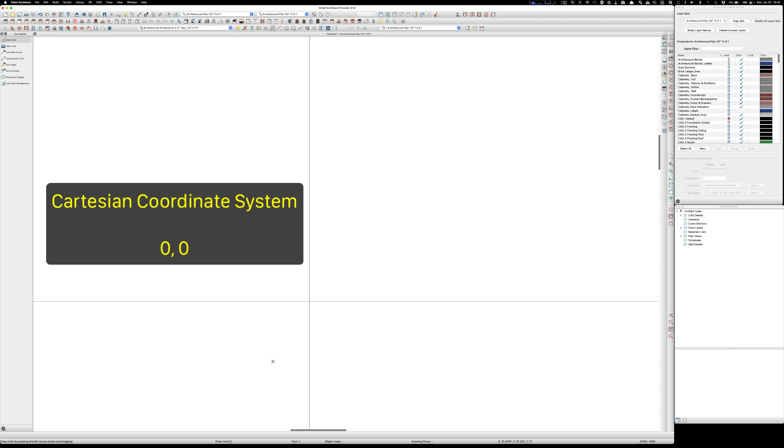All right, so what you're going to do, this X right here happens to be 0,0 in this software application. And actually, I'm going to take a box. I'm just going to go like this, okay? And I'll go, that's plenty long. And what I'm going to do here is I'm going to go with a 9-foot ceiling, which is 9 foot 1 1/8.

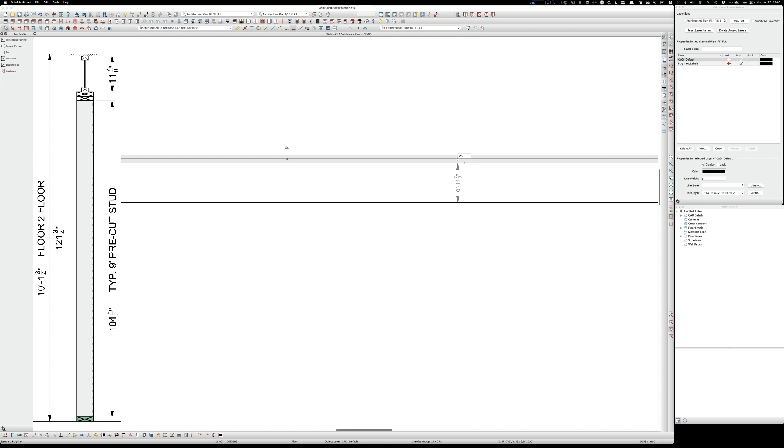And then I'm going to put another box on there. And this will be 11 7/8 I-joists. And then I'm going to put on 3/4 inch subfloor. And let's dimension that real quick.

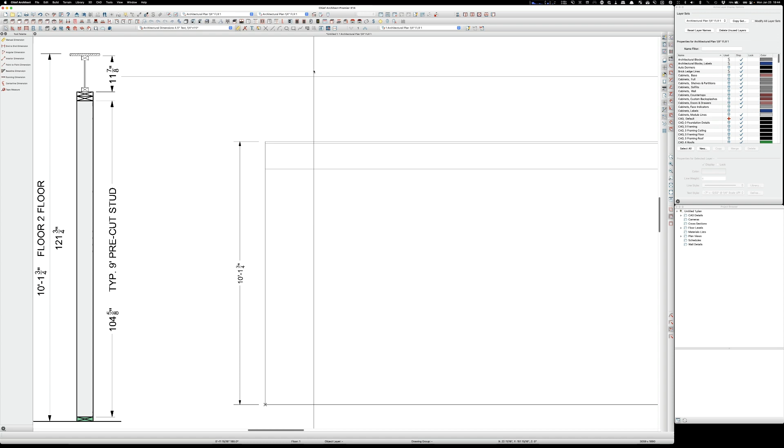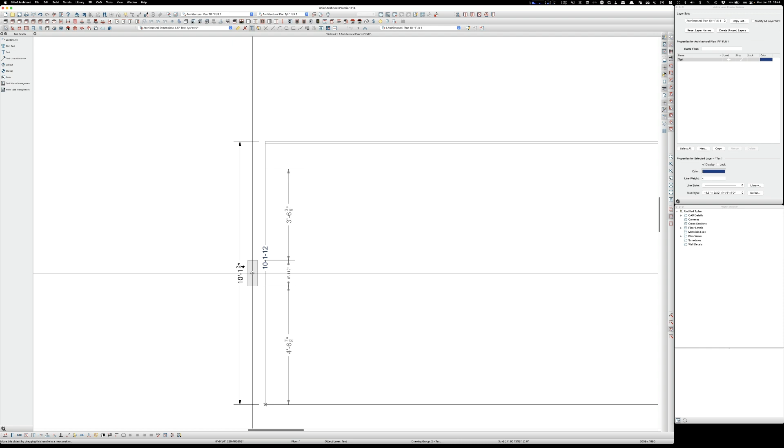All right, 10 foot 1 3/4. And if you were to write that in feet, inches, sixteenths, that would be 10-1-12. So I'm just going to put that number over there. Whoops, come here, you. Actually, I want to do that. That's weird when that happens. Some kind of shortcut thing. All right, so there's the height, floor to floor.

Let's say this is slab, whatever, and they're going to have LVP down here and LVP up here. Sometimes you might have tile or carpet or real hardwood or whatever, and then you'll have something different up here, and you have to take those into consideration when you're doing your calculations.

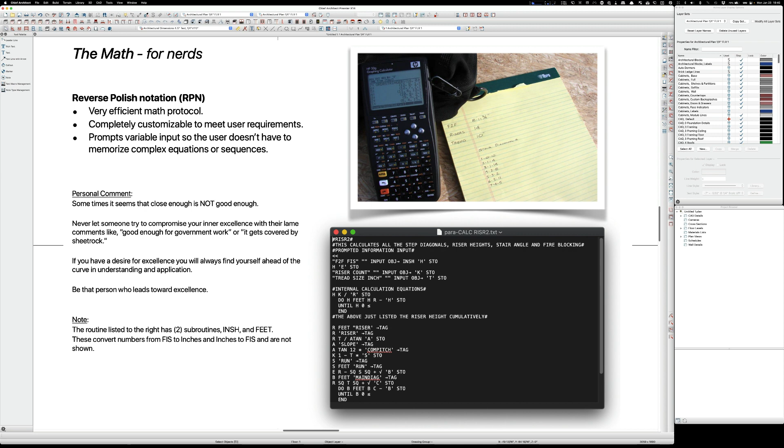So I'm going to try something new. I'm also going to include the calculator that I use and screen record it. And then I'll just learn how to use some video editing software and I'll mix it into the video somehow so you could see it, like it'll be off to the side or something. So give me just a second. I'm going to turn on screen record and microphone on. All right, so now that's recording.

Here's the calculator. And what we're going to do is we're going to hit riser 1. And our floor to floor in feet, inches, 16ths, we're going to enter that. 10-1. Oh, that's not, duh. Okay, so 10 space 1 space 12. So it's an array, and then you hit enter. And what this does is it gives you options on riser height.

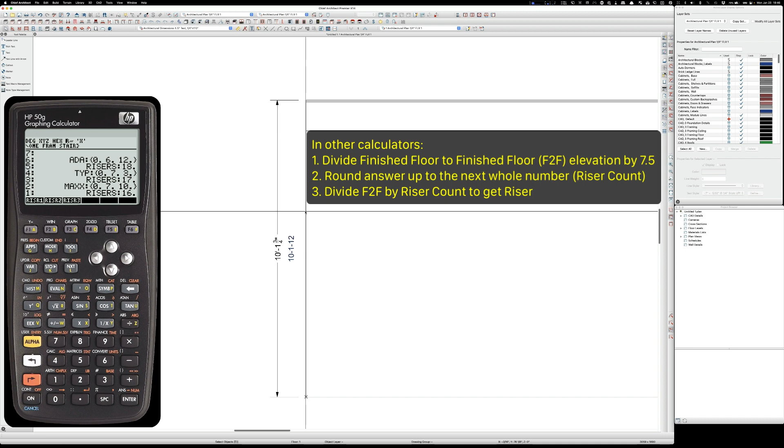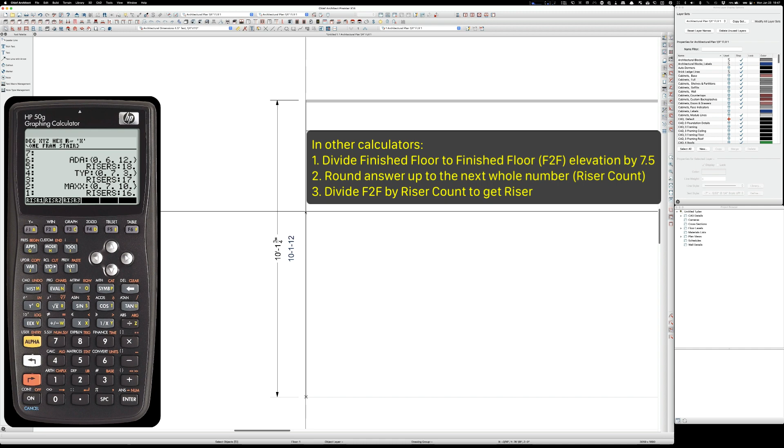So if I went with 16 risers, my riser height would be 7 5/8, which is the optimal riser height for stairs. If you did 7 5/8 and 10, that's optimal. If you want a more comfortable step, you would go down to 7 3/16, which is, it says TYP. Or if you wanted ADA, it has to be 7 inches or less. So you would be 6 3/4 inches with 18 risers.

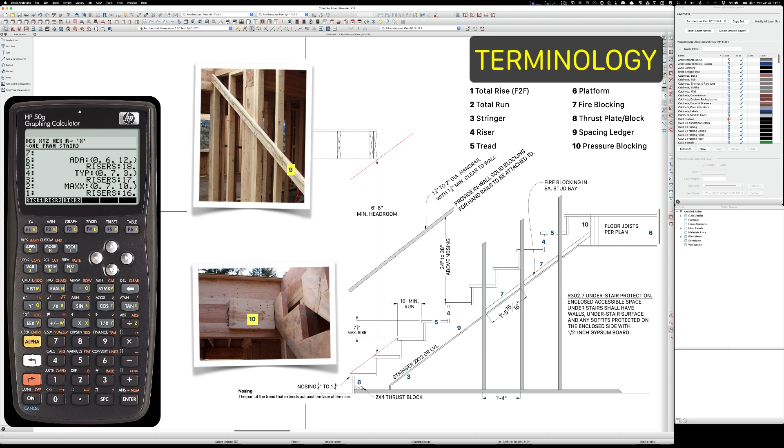And as everybody knows, as you add a riser, you also have to add a tread. So if your stairwell opening is tight, you're going to want to go with 16 risers and 15 treads. Or if you want to go ADA, you're adding 2 extra treads. So it could be 20 inches or 22 inches that you're adding to the length of your stairs. So for this one, let's do 17 risers, and we'll just take the middle.

So what I'm going to do is clear this. We're going to make these very comfortable steps. We're going to go like this. 10 space 1 space 12. Enter. You see how the calculator prompts you with the information?

No calculator in the world does this except this one, only because I programmed it, and you can program it too. If you had this kind of calculator, you can make it do exactly what you want. And one of the reasons I did this was I didn't have the money to have multiple calculators, and number 2, I don't like remembering all the steps and what button, and way more button pushing in a Construction Master or Build Calc where you could fat finger something. Then you got to start over.

So riser count, we said we were going to do 17. Enter. And on this one, instead of doing minimum 10 inches, we'll do 11. Enter. And boom. So let me identify these numbers. The first set of numbers on the bottom, the 16 long to short and 12 long to short, that's the length along the top of a board, typically whatever your walls are made out of.

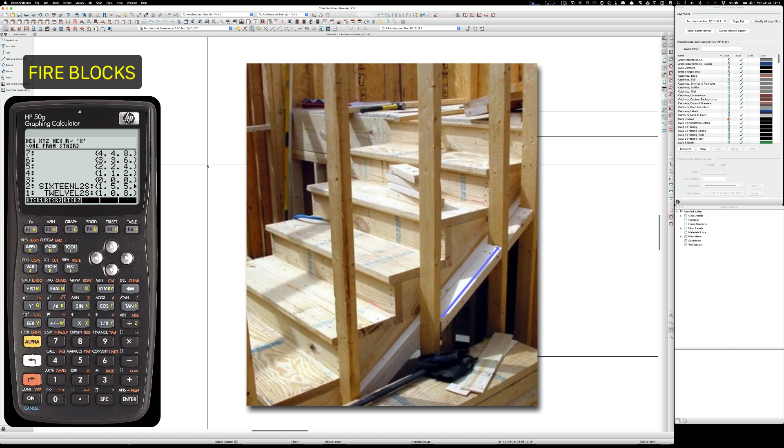And these numbers are your step diagonals. And that's from the intersection on the outer edge of the stringer where the riser and tread cuts meet, from that point to the next point to the next point to the next point. And why these are good numbers is you can lay out your 2x12 or your LVL, whatever you're making your stringer out of, and make a mark at every one of these points.

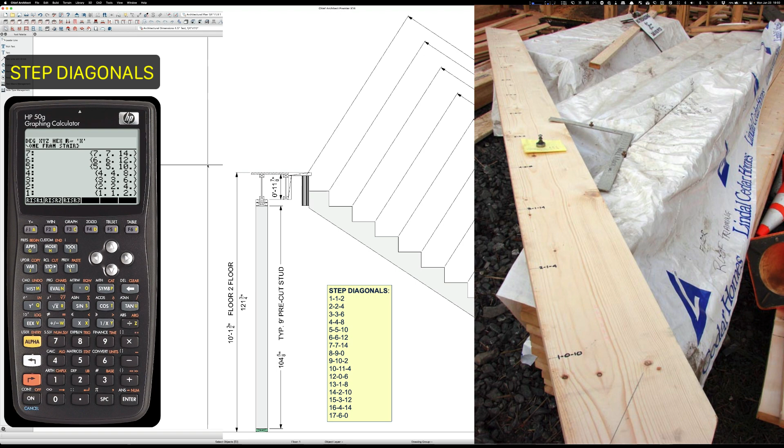And then as you're sliding your framing square along, you can make sure that you are lined up on that mark instead of coming along 11 inches and eyeballing it and maybe using a Sharpie and making your line kind of thick. Ask me how that happened. Yeah, I've done that. I've laid out a set of stairs where by the time I was done, I was over 3/8 of an inch off at the end because I wanted to use a big bold line.

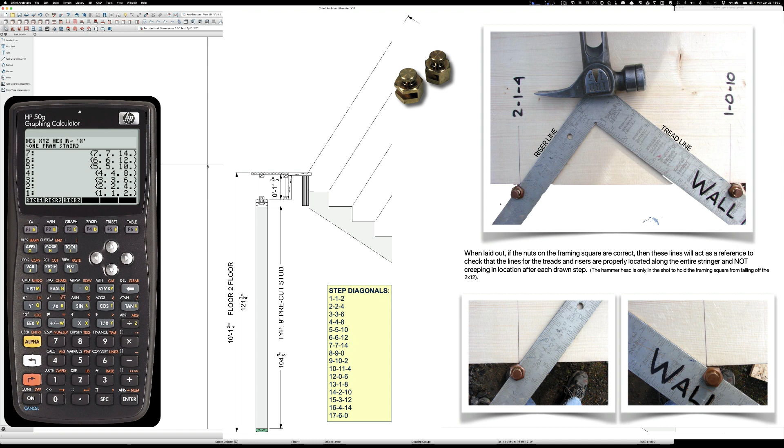So I was able to fix it, but to be precise, lay out your step diagonals, and there they all are. I'm slowly getting them.

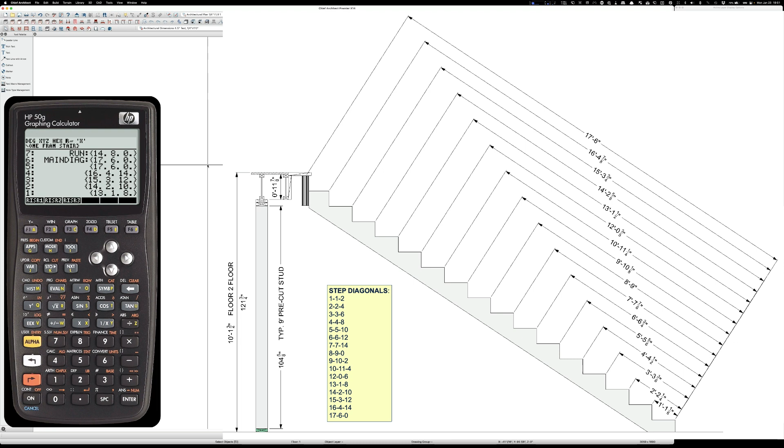There's a little bit of a lag in this iPad app. I think I'm going to turn that down a little bit because it's just a little bit annoying. I'm wearing headphones, so it's hard to kind of focus on that.

Okay, so your main diagonal, that is how long your stair stringer is exact. So if I was going to order a stringer, I don't think I would order an 18-foot because there's not enough. Typically, when you get into those kind of boards, there'll be a split or a crack. If this was an LVL, sure, 18-foot LVL, or you can actually order those and by the foot length. So anyways, I would order 20-footers.

And then here's your stair run, your stairwell run. And it's in feet, inches, sixteenths, or inches, because some people swear by inches. The common pitch, if you wanted to take your speed square or whatever, is 7.8 and 12, if you needed to draw that line on something.

And where it says slope 33.06, which is really, in framing terms, 33 degrees, that would be the bevel that you would add to your fire blocking so that you could cut long to short on a chop saw and make your blocks 1 foot 5 and 5/16 long to short at that bevel. There's the exact riser to that many decimal places, or it's 7 and 3/16.

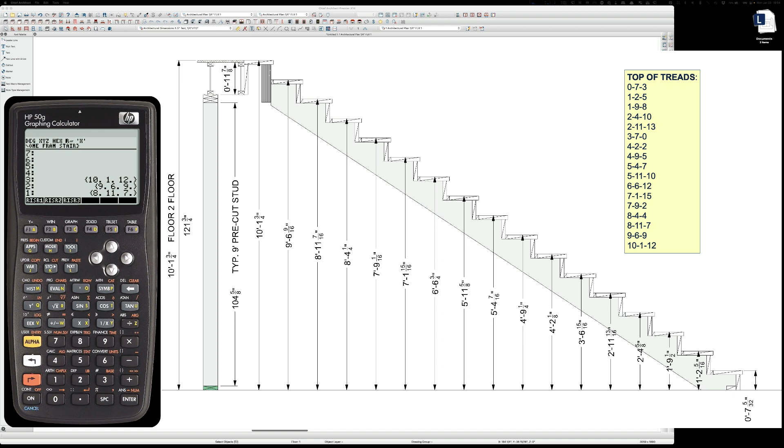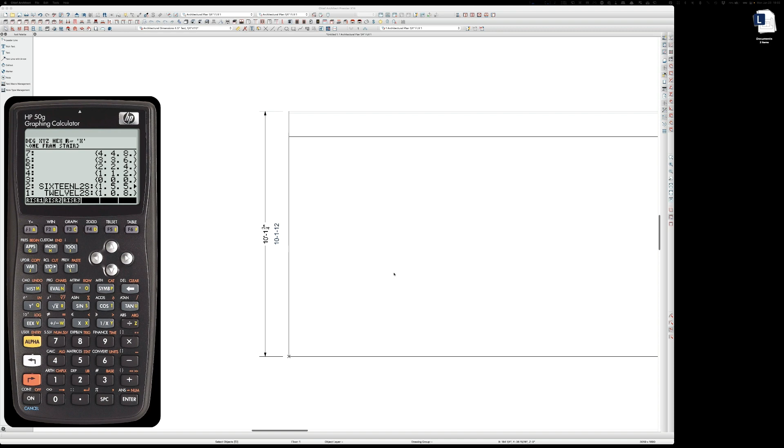So what I'm going to do now that I've erased everything, I'm going to go back and I'm going to really quickly crank these numbers in and then stop recording, and I will use this. Boom. Okay. We're going to stop recording on this one.

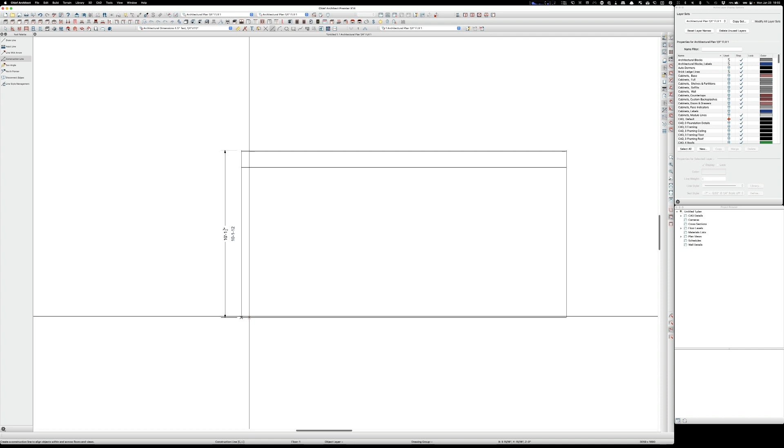And now we're going to come over here. This is the CAD program. I just need to get that exact number, how far I'm coming up. I'm going to try something different this time. I'm going to use construction lines like this.

And, whoops, sorry about that. These headphones are kind of, you know what? I don't think I need these headphones.

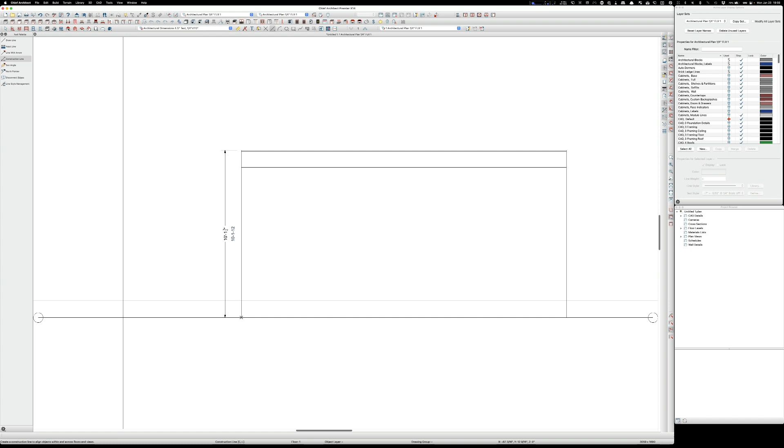And I'm going to take this, if I can grab it, and I'm going to go multi-copy. It's going to ask me for a length, and I'm going to go 7.16176470588. Hit OK. And then I'm going to grab this and just pull it straight up.

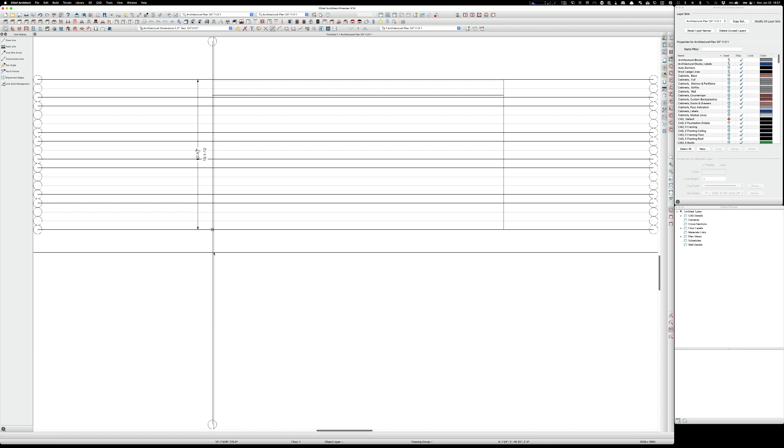Don't need these. Oh yeah, let me grab whatever I intersect with. Boom. Okay, so there's all the risers. And then I'm going to do the same thing. I wonder if it'll let me do vertical construction lines. Oh, baby. Look at that. All right. And then I'm going to go like this. Click on this one. I'm going to hit the multiple copy. I'm going to say 11. Go like this. Grab here. Okay. So that's kind of cool.

Now I want to just do a standard line. And it doesn't let me do line style from there. Okay. I wonder why that is. Let me just draw a line real quick and then check it. Yeah, line weight 5, CAD default. First of all, you know what I want to do with this? I want to open it up and I want to call it something different.

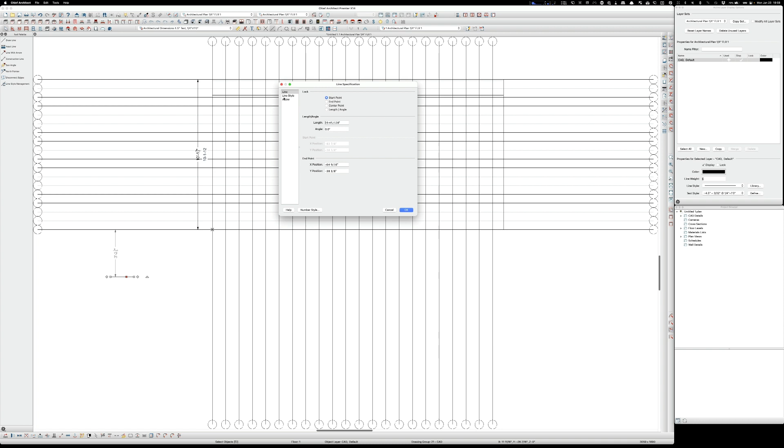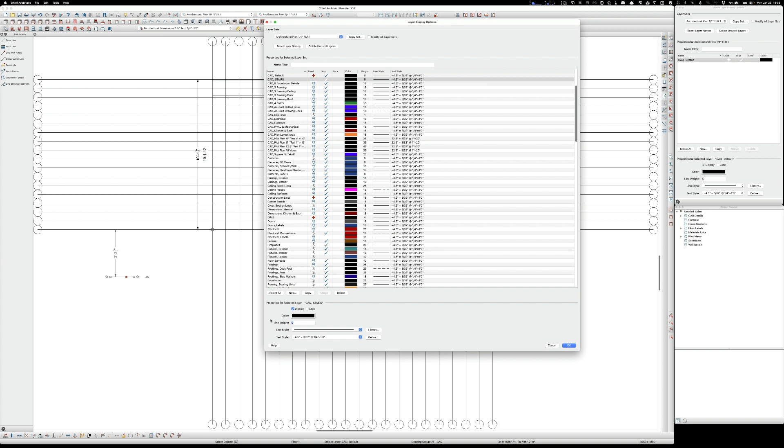Define. I'm going to call it, where's copy? Copy. And all caps so that it stands out. Stairs. And I'm going to change this to 10. Hello. 10. And hit OK. There you go. So now it's going to be a little thicker.

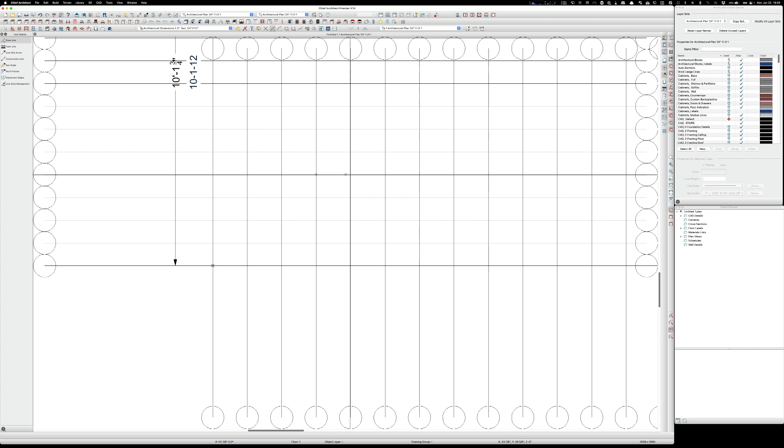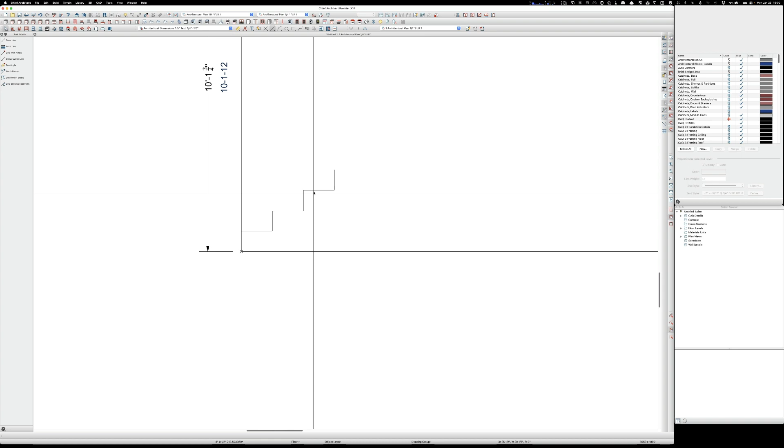I need this thing to give me those little intersect points. Come on. Why aren't you? You notice it's not letting me have that intersect point. What is the deal? So there's a way around that. That's okay. In fact, now that I got that started, I'm just going to say goodbye to you, goodbye to you. And I'm going to go constrained mode. Oh, interesting. Okay. So what I need to do is do one more like this. Tab 11, enter. And now I'm going to see, that's cool. You click it and the whole thing grabs.

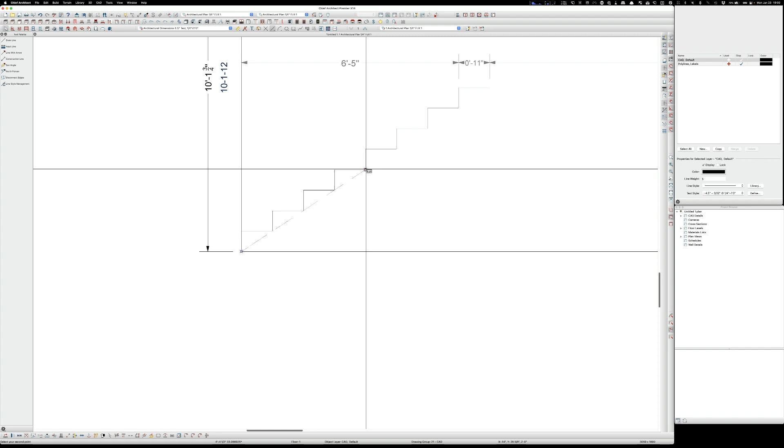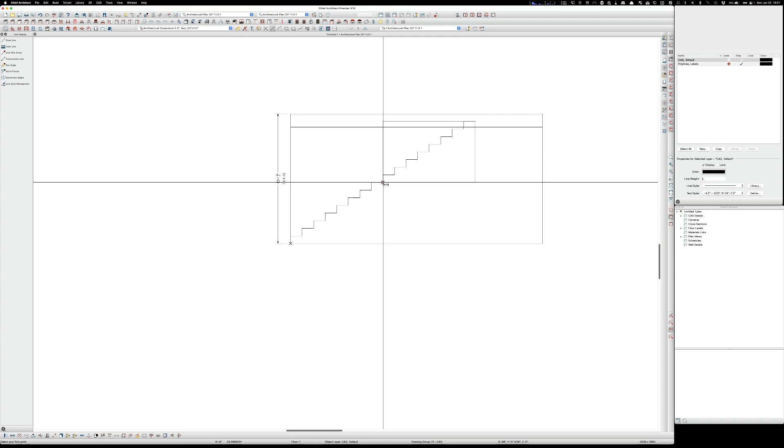So then I'm going to go copy and place, point to point move. Then I'm going to constrain the whole thing, copy and place, point to point move. Oh, look at that. It didn't grab the point. What is the deal with that? Copy and place, point to point move right there. You got to watch it. I don't know. Sometimes Chief is like smoking crack. Copy and place, point to point move. All right.

Now I'm going to, there's a tool right here, this line break tool right here. So now that separated that. So now I can, oh, come on. I click on that and then I hit delete. Boom. All right, cool. Then I can get rid of these. And I think these are all still here. All right, that's interesting. Get rid of you. Wonder why it's on here twice. That's strange.

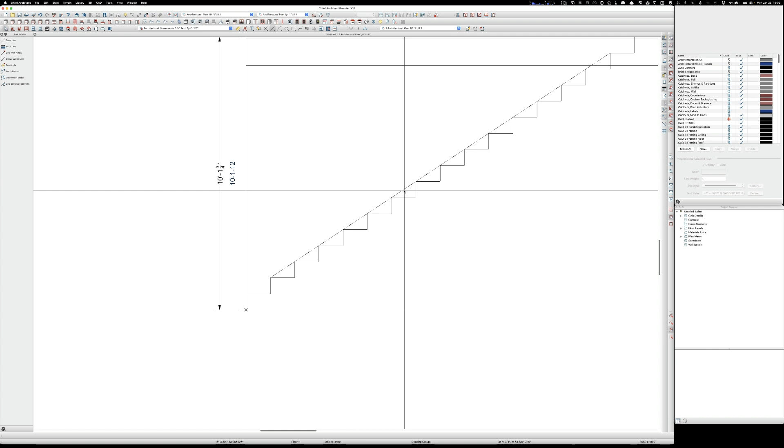Okay, so if all you did was do stringers, I'm going to say this is an LVL, right? So I'm going to draw that, copy paste. I'm going to bring it in a little bit. Let me see, where can I make that work? Huh. It doesn't want me to go all the way over there. These temporary dimensions are lame.

So, because here's the problem I'm going to have. How am I going to know I'm perpendicular? Because I'm not. See that? That might be perpendicular when it does that. I don't know. Let's find out. Let's go 11.87. Oops. I can really check that in case the software is messing with me, I can go 11.875, enter. Then you have to, it's pretty lame.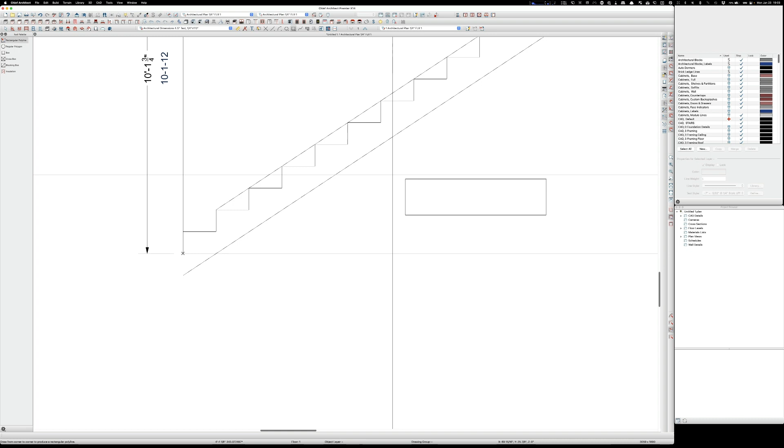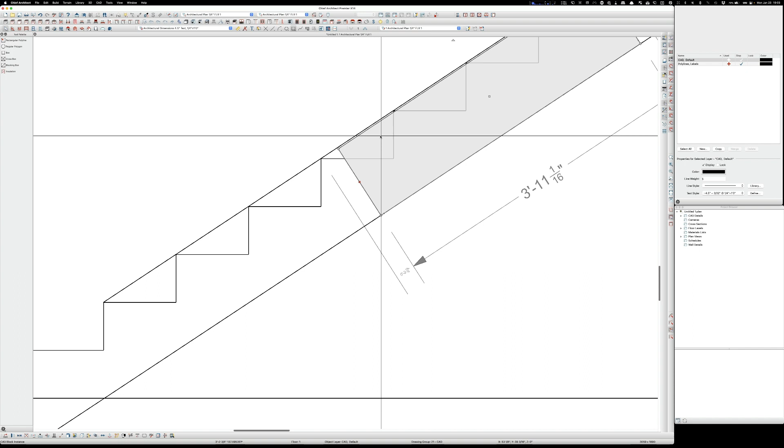Then you have to block this, which is this tool here. And then you rotate it somewhat close, and then you hit the parallel tool here. And you do that, and then you bring this point to point to like right there. Yeah, see? It wasn't even right because that dimension error wasn't right. So this box is 11 7/8. And I want this to be there so that I can bring this to there.

See, so Chief Architect has some goofy stuff going on sometimes. It's okay, but it's not the greatest. Like if you were doing 2D line drawing all day and you didn't have to do any BIM editing or any 3D modeling, AutoCAD 2D is probably pretty good in my instance.

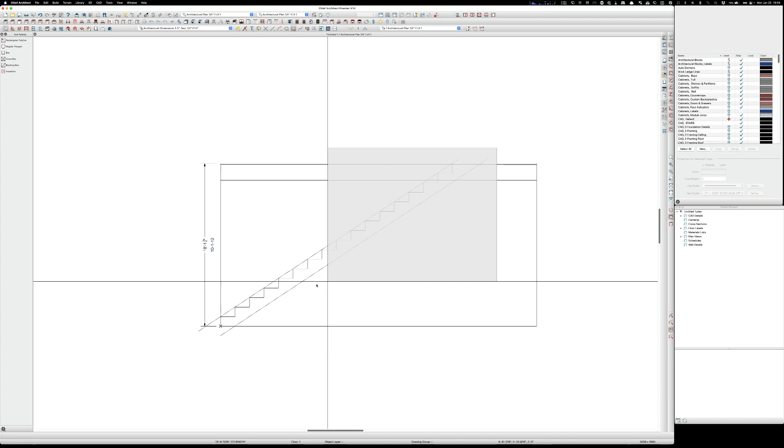So now check this out. If I add a tread on here, then I'm going to be taller than my 7 3/16, right? And that would also mean that my last tread would stick up above the floor. So the rule is, for this kind of work, you always, let's just grab this whole thing and see if it only grabs. Yep. And then come down, I believe it is that one. And in the Y is up and down, so we're going to go minus 1.5, because here's another thing.

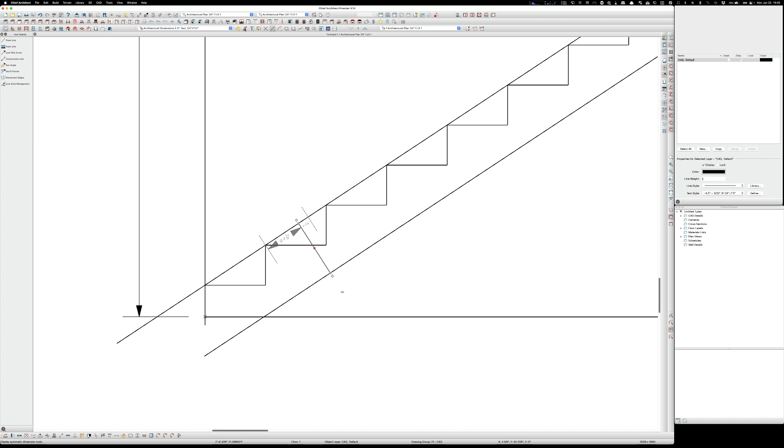I like using real lumber. Yeah, of course. Don't even do that. I like using nominal lumber. I don't like, there's people that really like the 1-inch OSB pre-made treads. I can't stand those. I mean, if you like them, fine. But I think they're lame. And the reason why I think they're lame is they're OSB. They'll end up out in the rain and get all kinds of rot and swelling and goofy, and people are like, oh, it doesn't matter, you know, you're going to get a carpet pad, blah, blah, blah. And as soon as I hear anybody complain about that stuff, it just tells me they suffer from being a hack, in my opinion.

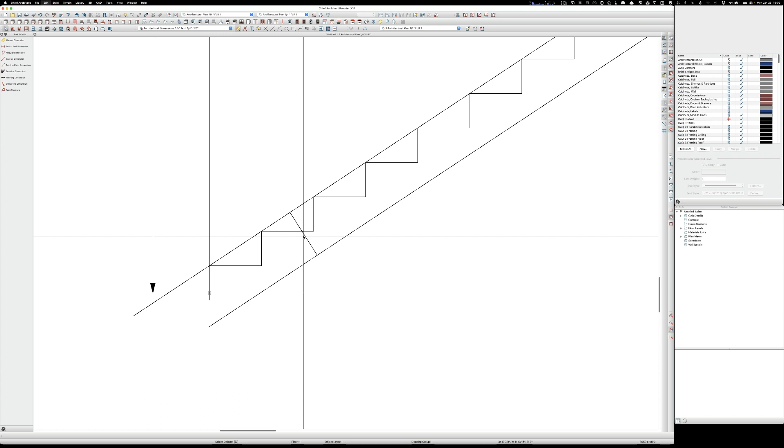All right. I could be wrong, but that's just how I see it. Why in the world? Why am I fighting this so much? Got to go back. I guess I didn't grab everything. Lottie-dottie, everybody. I told you this would be a long one.

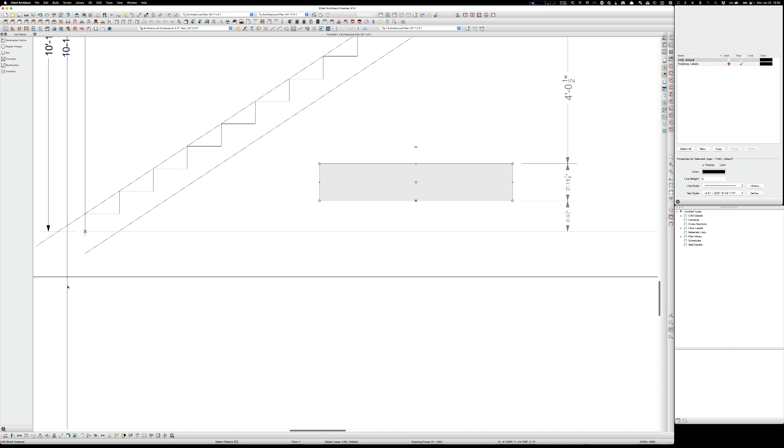So, again, block the... You can't just rotate it because it'll try to rotate just one side. Yay, Chief. But once you start learning what you have to do, then you have a repertoire of workarounds. And when you go to the Chief Talk site, all these guys that are the masters, they will have every possible workaround that there is. I guess writing code is complicated. I don't know how to do it.

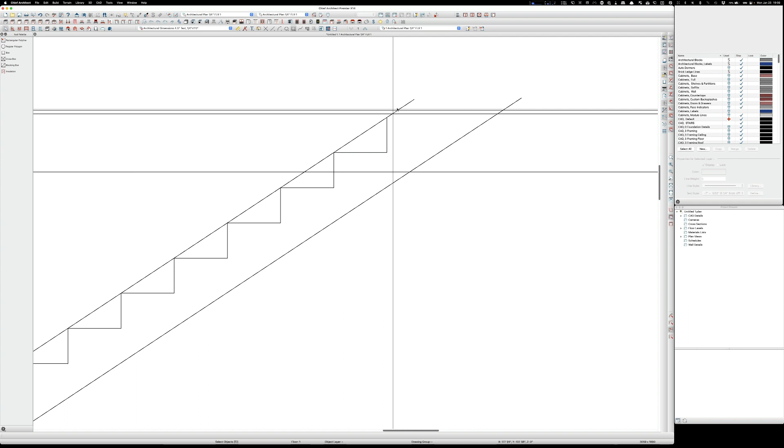Okay, so we've dropped 1.5 inches. And the other thing is, once I put 1.5 inches kicker, some people are like, oh, you only need 3/4 inch. Yeah, okay, so there's a couple reasons why I use 1.5 inches. Typically because this height is going to be a 2x8. It's either going to be a 2x8 with an itty bitty gap at the bottom, or a 2x8 that you might have to rip or whatever.

But each one of these vertical risers becomes its own little beam. And so if you had a pretty wide stairwell and you had, say, 4 stringers total, 2 in the middle and 2 on the walls, the ones on the walls are attached to ledgers, and they're not going anywhere. The ones in the middle might sag a little bit, and if all you had was plywood, it's not going to help hold them up as much as a 2x8. 2x8 makes it way more solid.

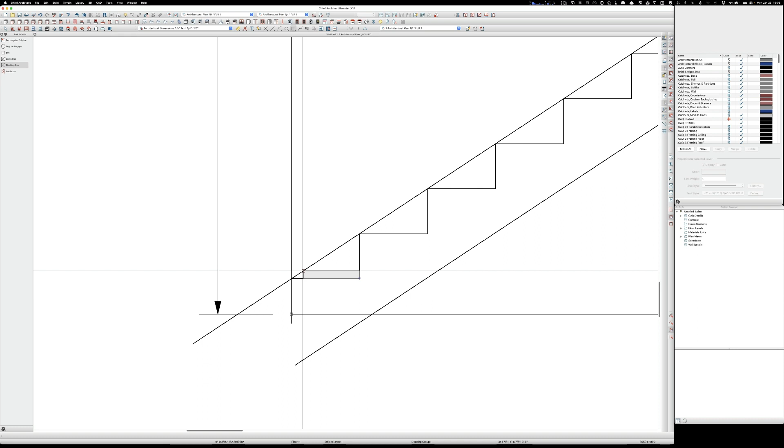In addition to the fact that you're probably going to put some kind of knee wall under here, because nobody's going to sheetrock all the way down to nothing. They'll go pretty far, but it all depends on what you're using the closet for. So let's do this. I don't know if you saw what I grabbed. These are going to be 12 inches long. And it's going to go out a little bit because this is also, what is this, 1.5 inches? Okay. And then the riser, I don't really need this right now.

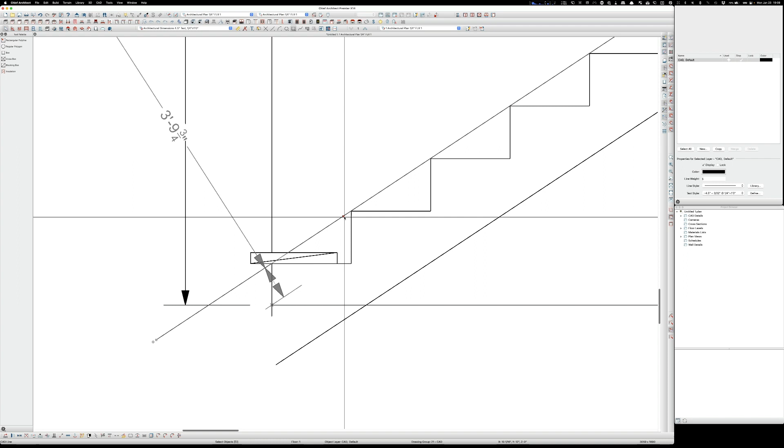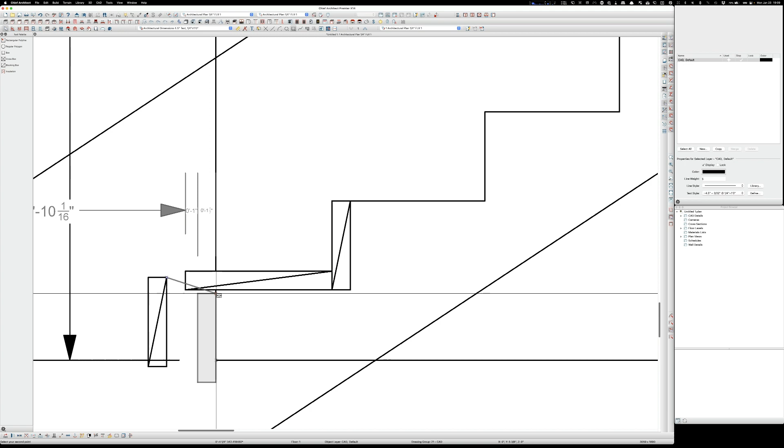Wow, that's so crazy. I guess I pasted 2 of everything. It's kind of crazy. 1.5. Maybe I should speed some of this up so you're not stuck watching some really super boring video. Copy, paste, point to point. You'll see now that that one riser we just did, it'll be ripped down to 1.5 inches less.

What is this? Oh yeah, it's part of the box. Oh, it's part of that. Okay, I gotcha. Yeah, we'll delete you. Okay, I'm going to say that's okay for now. So here's what we can do now is we can take this and this. First, let's just see, it should be 1 inch. Let's get a dimensioning tool out here. Yep, 1 inch. Okay. So we have a 1 inch nosing.

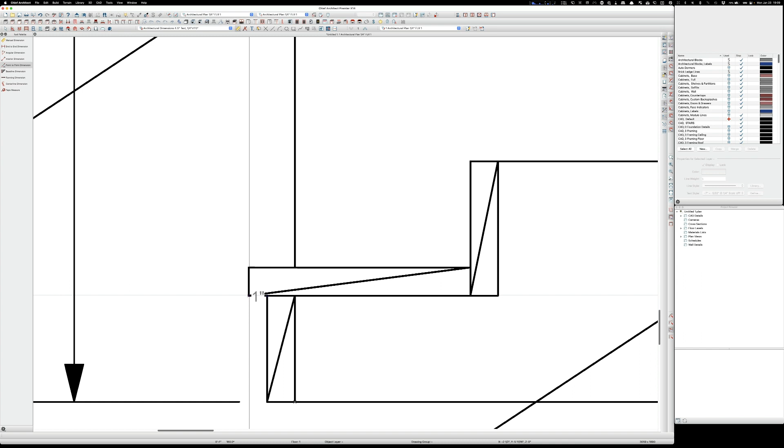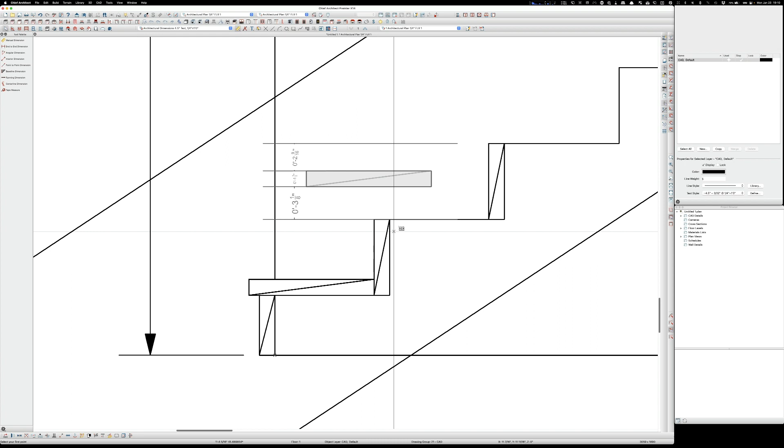I'm going to block this. So we're going to come down here. No, that's probably a bad idea. Yeah, that's not a good idea. Unblock this. This isn't the right height. So I'm going to copy this. Use point to point. If you're wondering what I'm doing, point to point is this one here. So you highlight it, click on this. That's a very useful tool.

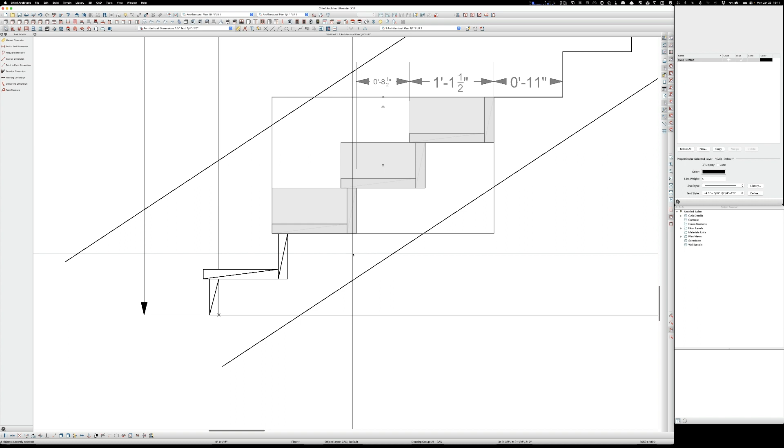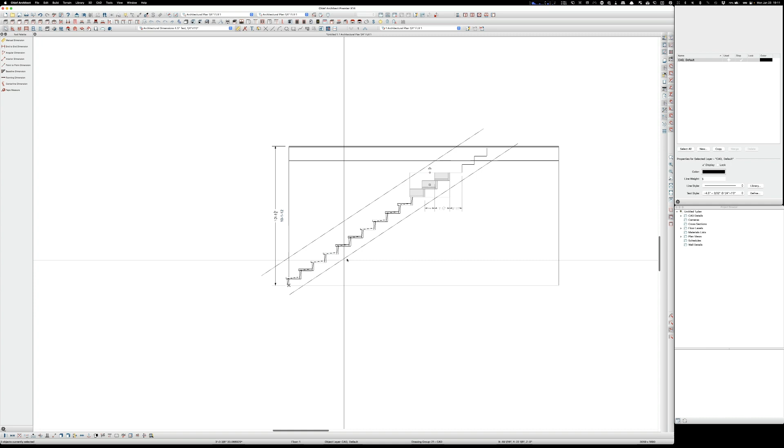So what I'm going to do now is I'm going to go like this, like this. I'm going to block this. And then I'm going to copy, point to point move. Now I can hold down Shift and copy in place and point to point move. And copy, point to point move, and so on. And then let's explode this.

It depends on how you do things. Some people will run their stairs, like I'll show you here. You can either do a drop stringer, or you can bring your stairs all the way up and put your last tread right flush with the subfloor. There's pros and cons to both. If this top tread ever cups or ever cracks or whatever, and it's even with your subfloor, so now you're going to have your flooring over it, you may not notice it, but it could give you a hump.

And if you were going to put wood on these stairs and you cut all these treads back so there's zero nosing, I don't think this would even make a difference because you would have an inlay piece up here that would stick out whatever your hardwood is, and it would just be the same.

So, but I personally, I like to go all the way up flush and inset this into the floor system, only because the stringer has more to lean against. So I'm going to do that. I'll show you how I do it. Copy. Point to point, if it'll grab it. I guess I got to unblock this one to grab it.

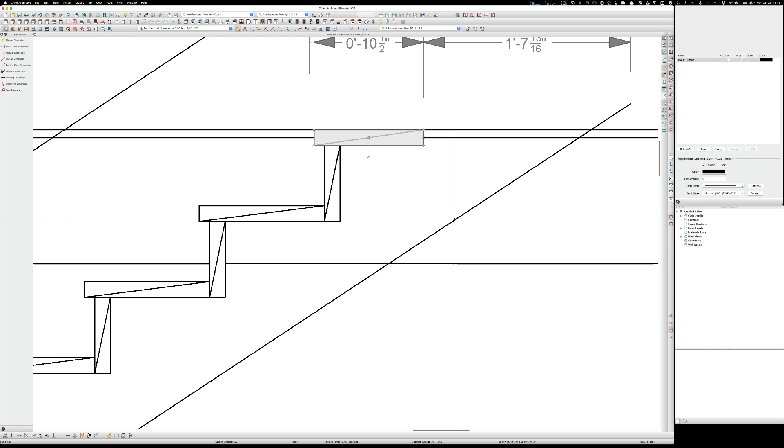And I typically bring this back 1.5 inches since I have to match with the kickers. So this would be 10.5. And then this, I guess I could draw 2 lines. That would work. So the letter L line. Oh yeah, I can do that. There's a trim tool too. Shortcut TT, trim shortcut TT. And then I would do, let's do some X blocking instead of some block blocking.

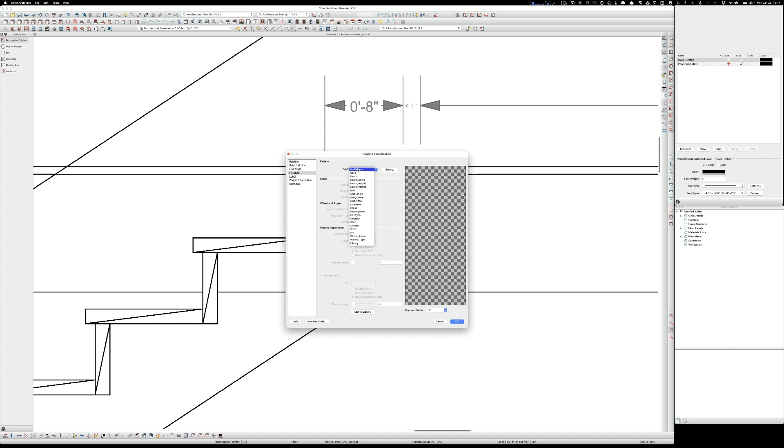Oh, you know what we're going to do? No, we're going to do something different. Let's say here at the top of the stairs, we did I-joist, right? Is that what we did? 11 7/8, yeah. So this will be 1 3/4 inches. And we're going to fill it with a hatch vertical that is 0.25. And we're going to multi-copy it and hit that 1.75. And then all I got to do is this. Boom. So I got 2 of those.

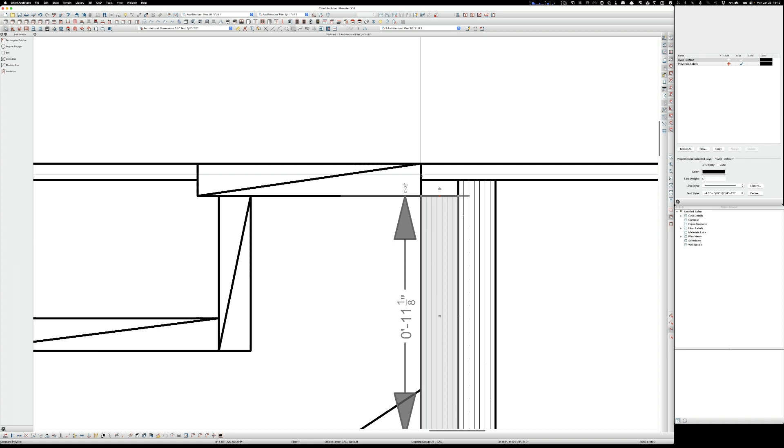And sometimes, if I remember correctly, I want to say I do this. I don't remember. I haven't built a set of stairs for a while. So let's do this. It kind of depends on what the builder has on site as to what you can get. If you're actually the full framing contractor, you pretty much give him a takeoff and he will get you what you need.

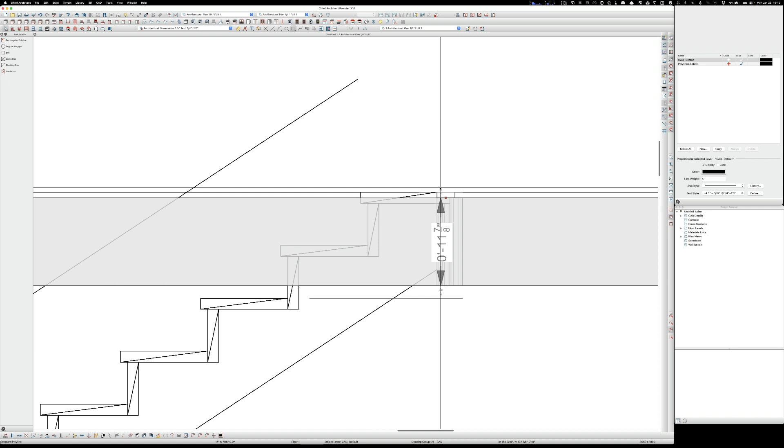Yeah, I don't need that there either. But I don't really need that dimension. I need this one. So there's 12. I'll bet you I would go about half. Go here. Go 3. Wow, these are thick. We're going to turn the line thickness off. Do a little notch. Bring this over. Because what I really want is a good gluing surface, and I want the tread to not have anywhere to go.

Right now the tread's being supported by this stringer, whatever other stringers are behind it. It's not going to sag, not going to move. But it's even better when you can notch it into an LVL or half of a, say it's just nominal lumber. Because then you can glue all the way along here, and then you can nail down into it on a diagonal, and it will hold, let's say 5 nails all the way along a 3-foot board with glue. So you're holding this tread super, super stout. And if there's any kind of deviance here, like one's taller than the other, you can always just belt sand or plane it off, electric planer or whatever. Just watch for your nails.

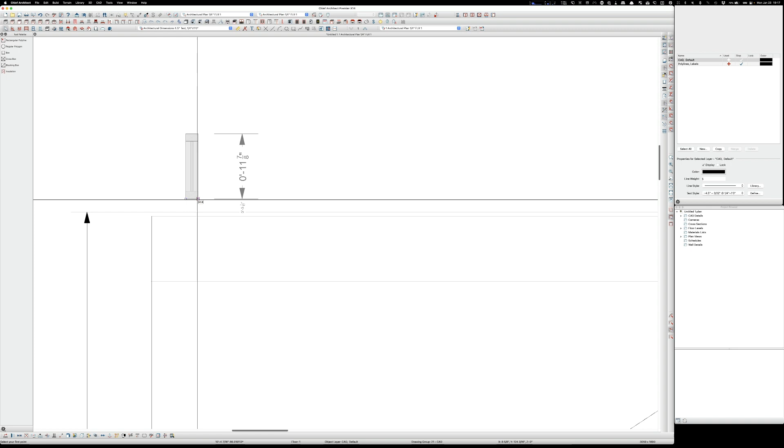So I'm going to come over off screen for a minute and grab, what is this? Look at that. There's an 11 and, oh, that's a big one. It's got the wide bottom, whatever, the bottom and top chord. Just put that there for now. What I'm going to need to do is copy, paste, put this one back here on the nosing.

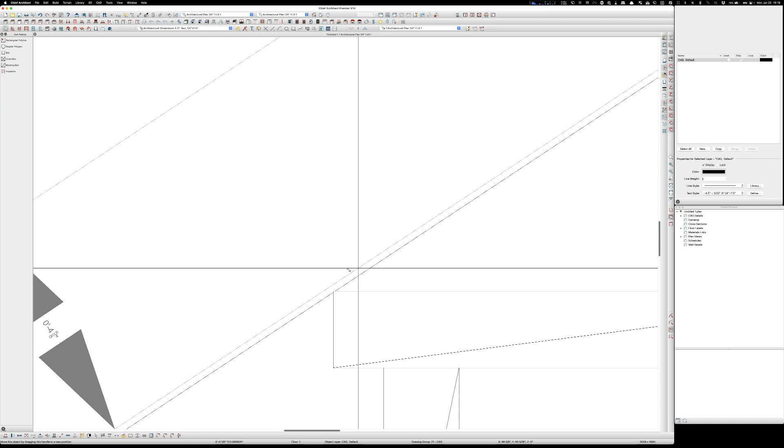But, oh, you know why it didn't snap? Because these are all blocks. So let me just unblock one of these, come down here. I need this line to snap exactly on this tip. This is going to be part of the 6'8" headroom clearance. So I'm going to click here. What is it reading? Why can't the temporary come down here to this line? What is the deal? This is stupid. All right, so let's do this then.

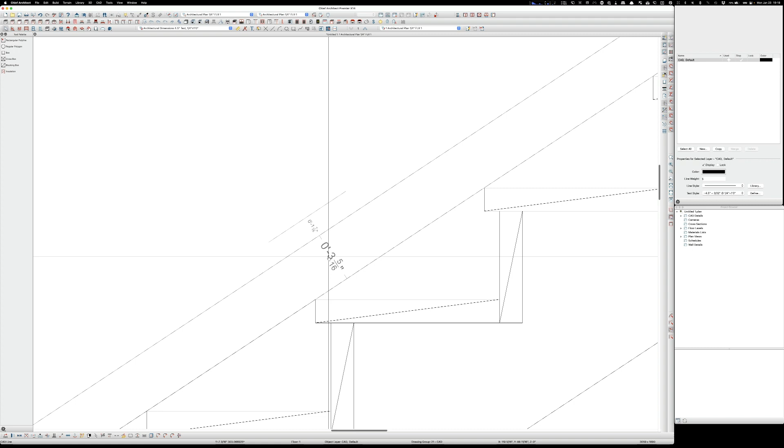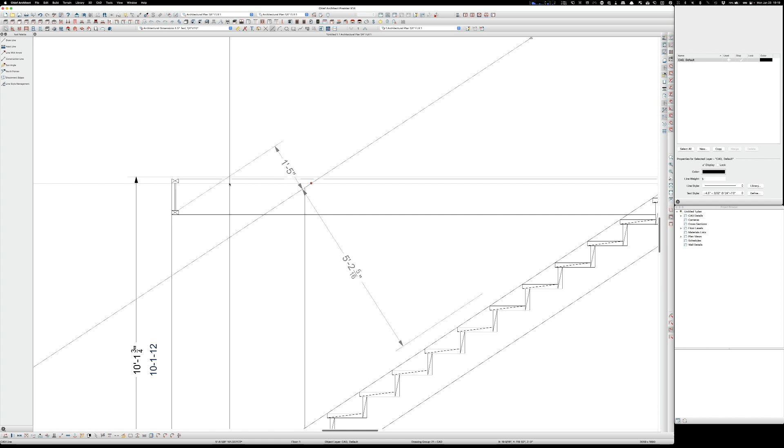And then let's do this. Oh, you know what else? It's not in that direction. It's in the vertical. So I'll come down here and just draw a line, start drawing, tab, 6'8". Come here, grab this one, just drag it right to there. I don't know which way these joists are going to run, but for now they're just going to run this way. I'll do this, 16, enter.

Yeah, then this would be brought back, and you'd put a piece of rim in there. There's no way you would just leave the, let's see, what are we going to use for rim? Just a box, I guess. And that rim board's typically an inch.

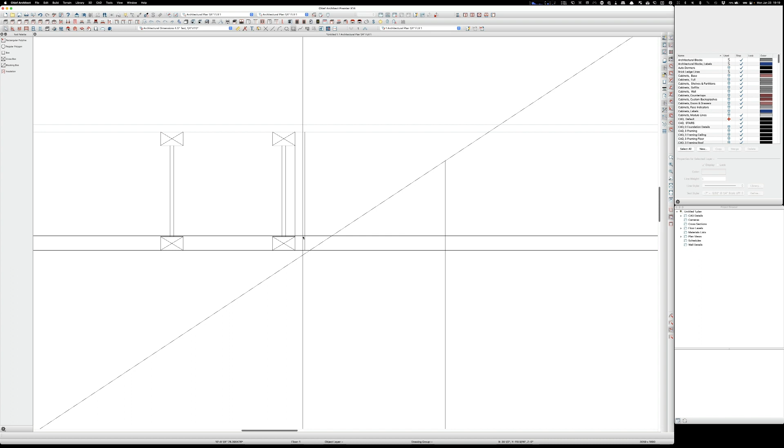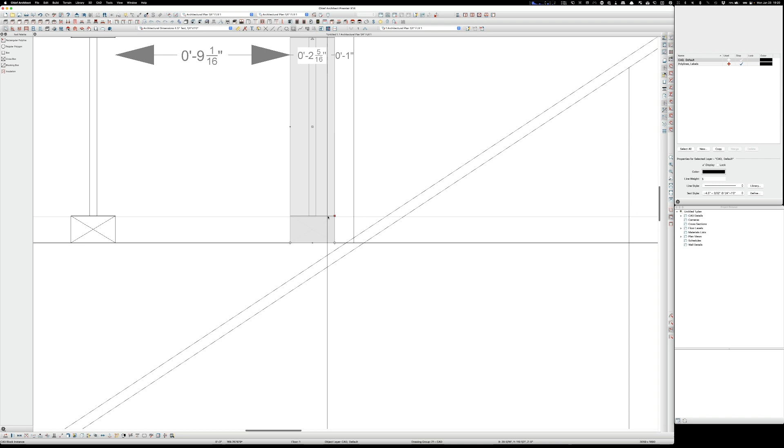If you wanted to be super exact, you would copy, paste this, and go 0.5 for the sheetrock, then move this. So once this thing is sheetrocked, your framing has to stop right there for this to be 6'8". And then just to make sure, you'd dimension this from this line to this line, making sure you're hitting the line.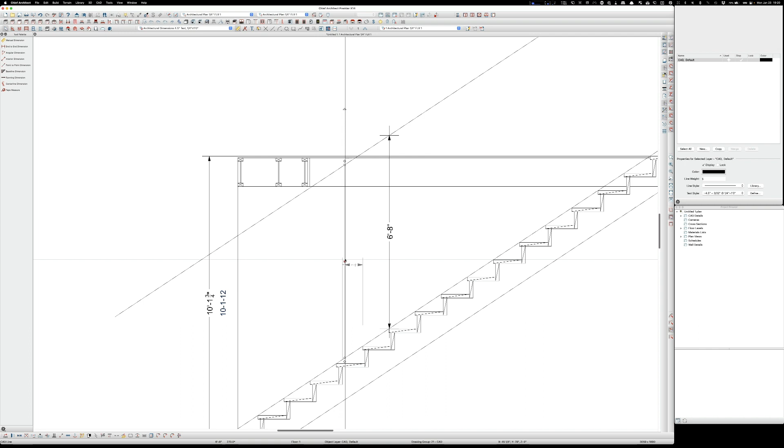So that's the cool thing. I've had people say, well, you're just putting numbers in there. Nope, you're drawing exactly what it is in 1-to-1 size. And when you dimension it, you get back what you just drew. The best trick is once you start a line and hit tab, you can punch in exactly the length you want.

So I'm going to get rid of this. Well, actually, I'm not going to get rid of it, I'm just going to bring it down here, because if I was making this into some kind of stair detail, I would want to leave this like that. Oh, I hate these, why are they always so huge? I don't know why it has to be that big. A lot of the default settings need to be looked at.

So whatever your tread thickness is, you cut that amount off the bottom, and whatever your riser thickness is, you cut that off the back. In theory, you could have like a 5-inch tall tread - let's say a 3.5-inch 4x12, a big piece of timber - and as long as you cut the same amount off from the bottom, your rise is the same. Your first step has been compensated, like right here, 7 3/16. We pull that out.

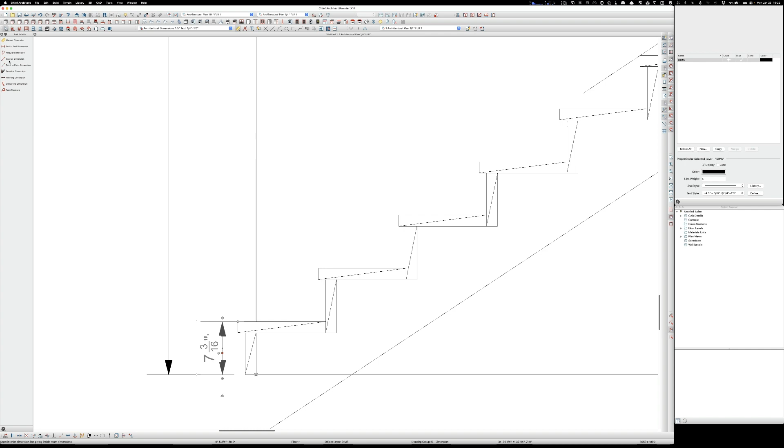I couldn't measure it from here over to there because it doesn't let you measure point to point - it'll go on an angle, not like AutoCAD.

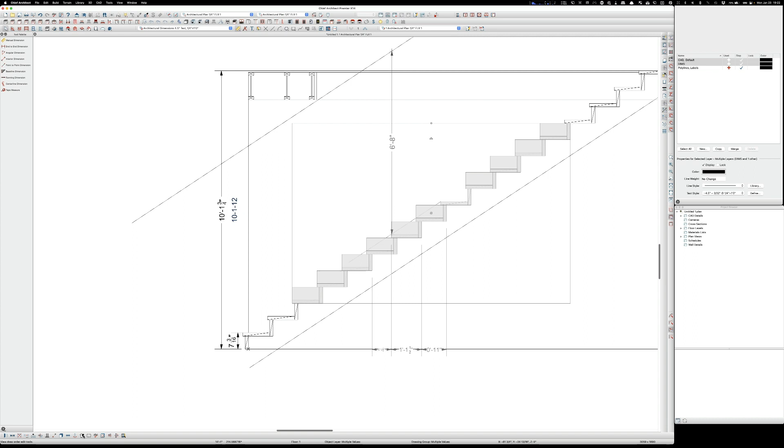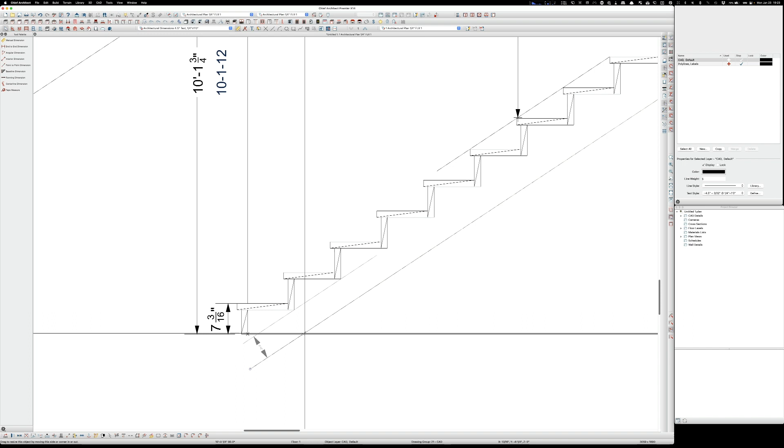And so, yeah, we're all blocked. Okay, I'll just grab one that's not blocked. Let's do this, and we'll go unblock. Well, okay, maybe it doesn't want to do that. I'm going to regret doing this - I'll need to move something and then I'll have to reblock it again. Okay, I'll bring this up here. So now, here's another thing that would be nice if it did this. Let's see, did it grab it all? No, it didn't.

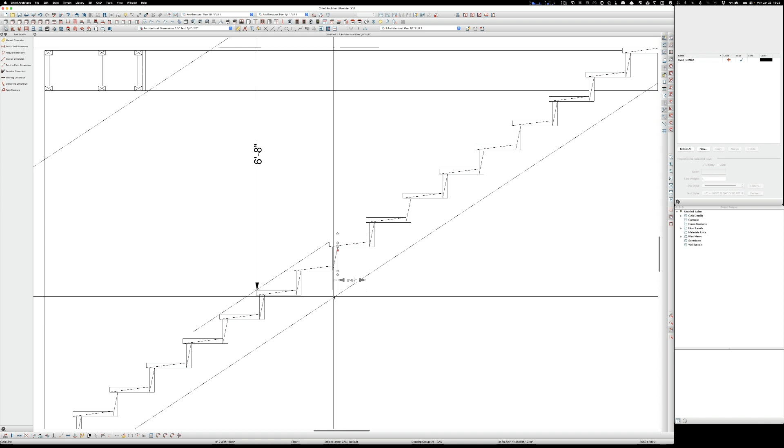So if I start tracing this out... okay, anyways, once you close the polyline or the polygon, then you can fill it with a color. And see, it's just starting a new line - it's so stupid, you're supposed to be able to take the end of a line, grab the diamond, drag it over, and keep going. Instead it's starting a whole new line. It takes time, I'm not going to waste your time, but anyway, I would trace all these out, then move this and delete all the extra lines it created, then bring this back. I'd be able to fill this with a light gray or some kind of hatching just to make the stringer stand out.

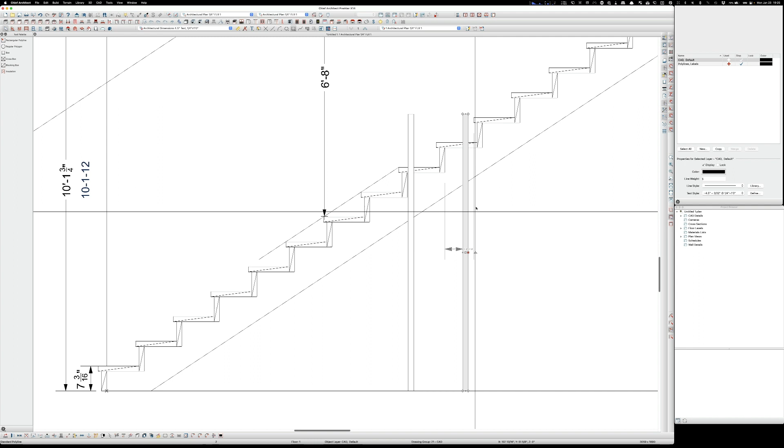Now let's show how that fire blocking worked, because I know everybody's wondering - hey wait a second, you calculated fire blocking, so why don't we look at that? So I'm just going to take a simulated stud, fill it with white so it hides everything behind it, so it's less confusing. I'm going to use this tool and tell it 16 inch is perfect. And then the fire blocking usually goes from here to here, and it's a 2x4.

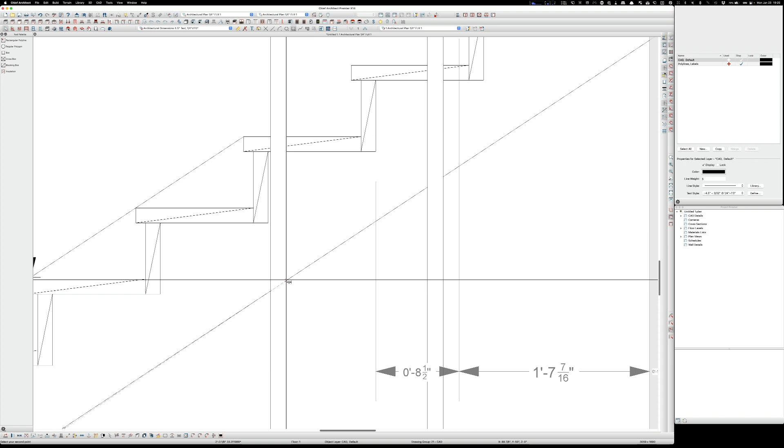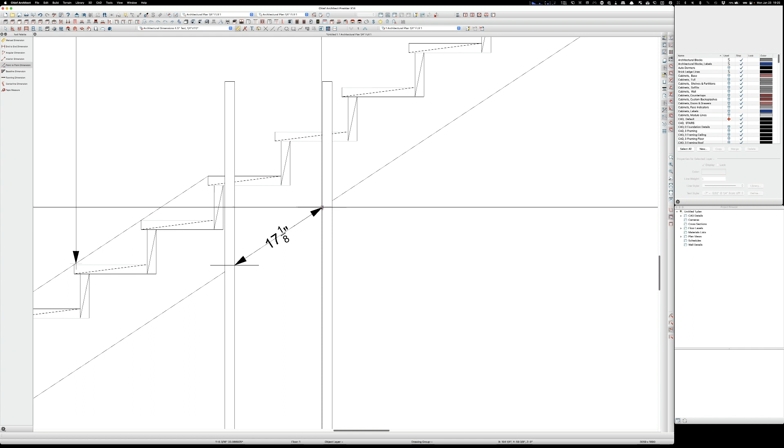Escape, escape, escape. I go to dimension, I go to point dimension, I go here. 1'5" and 2/16. Well, mine was not - mine was 5/16. So what's going on here? I must have done something wrong.

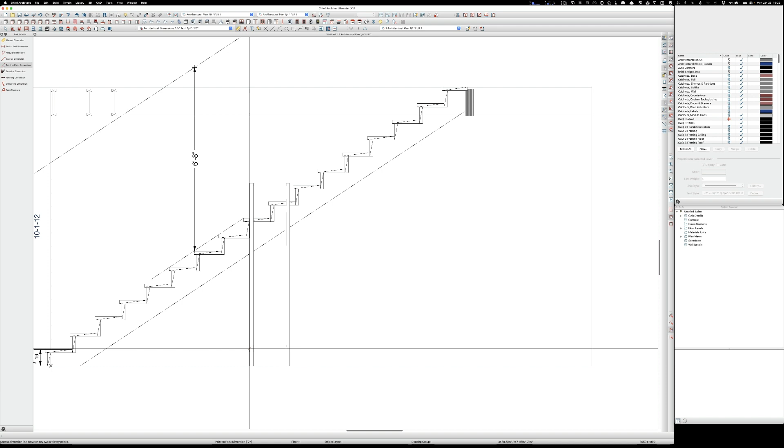That's 16 inch. Oh, that's not 16 inch. What the hell? Oh, duh - you know what, I just made a random shape and never checked it, and look, it's not the right size. So 1.5, there you go. Now I can do this. 16, enter. Yeah.

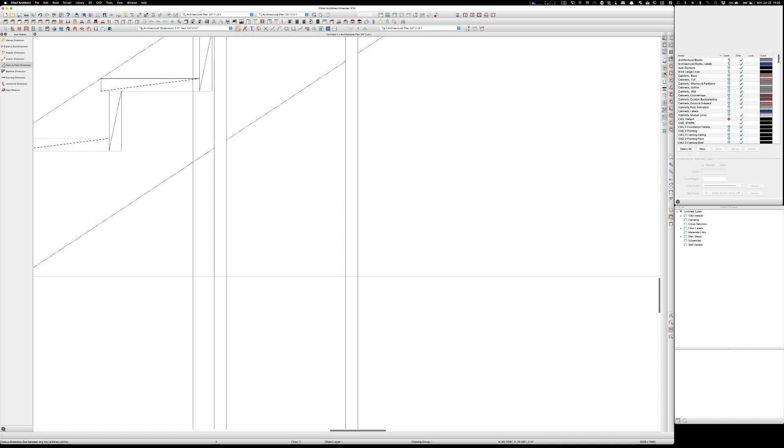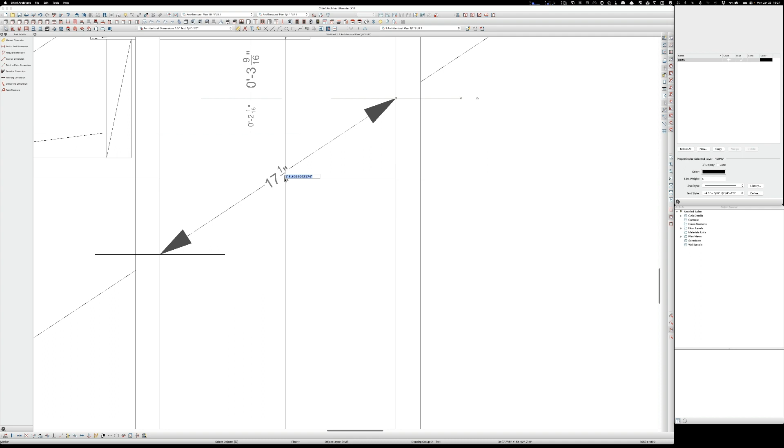It confuses me when it says I'm wrong, because I've worked a long time on this, ever since 1990, to get this right so that when I calculate things on the job site, they're right. So that says 17 1/4, but what it really says - let's try something - what it really is right there is 1'5.302. So the exact length is 5/16. But Chief, it's so close to going between 1/4 and 5/16 that Chief is saying, oh, we're going to just call it 1/4. So there you go. And that's such a small amount that if you cut your blocks 17 1/4 long, you'd be fine, but if you want to be ninja perfect, you'd make them 5/16.